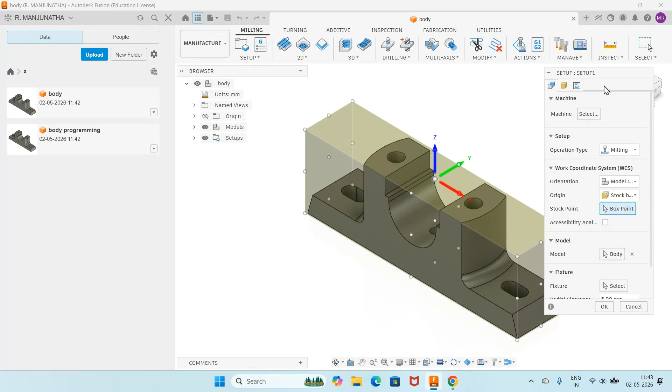Now if you click on this side, the front view, you can see whatever you have in yellow, with the snapping points - those are all stock box points. But since the stock is to be removed, the origin point of the stock will be removed the moment we start machining it.

So always remember that the origin point should always be the part. For that, you come down and click on model box point, and observe these snapping points - what will happen. Automatically, the stock points or snapping points will shift to this gray part. Whatever is in the gray part is the one which actually represents the part's snapping points.

So if you go to the 3 dimension view, you'll be able to see which are all the snapping points. I want to take the top lower left corner here - just click on this. So the origin point is shifted to the model box point, at the lower left corner, at the top portion. Always remember that the origin point should be at the top surface of the model.

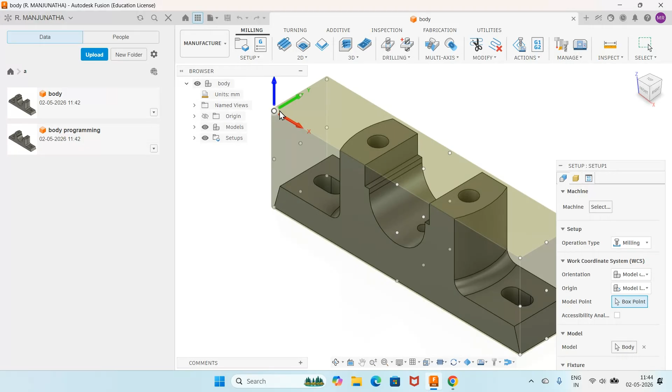Once you do that, you come down to the stock. Since the mode is relative - with reference to the model part - I want to give the dimensions. So I'll go for the stock side offset. I'll take this as 5 mm.

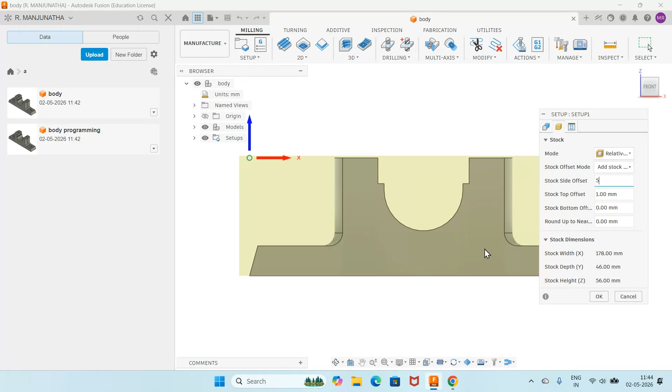On this side, you observe - on the left side it's taken as 5, and similarly on the right side also it's taken as 5. Then I want to give the stock top offset as 5 mm, so it will take the top offset also as 5. And in the bottom offset, I'll take it as 20.

Because I need the part to be clamped in the beginning, that's the reason why you're giving more material at the bottom. These are the stock dimensions - the overall dimension of the stock after giving the stock offsets. Once you do that, just click on OK. So this is the first setup of your model.

The moment you do that, the next point is I want to go for the operation. What operation I want to do in the beginning is remove 5 mm on the top surface of the model. To do that, I'll go for 2D facing operation.

Here, the moment you go for the stock offset, this stock offset always depends on what raw material is available in your shop floor. Based on that, it will be done. Or else, if it's not there and inevitable, you can purchase material from outside. The main intention of showing all this is because I can add the stock material to the part which already has the finished sizes - for that, I'm using the raw material.

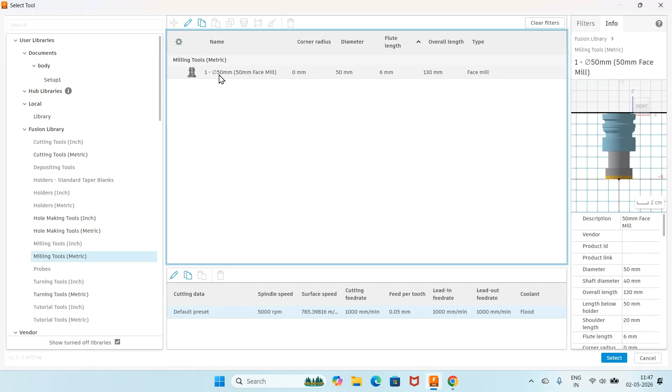So the tool category is milling. You come down to face mill, click on this face mill, enable it. So only the milling cutters of the face mill which is available in the library will be listed here. You just click on the milling tool and click on select now. The moment you do that, the cutter will appear on your screen.

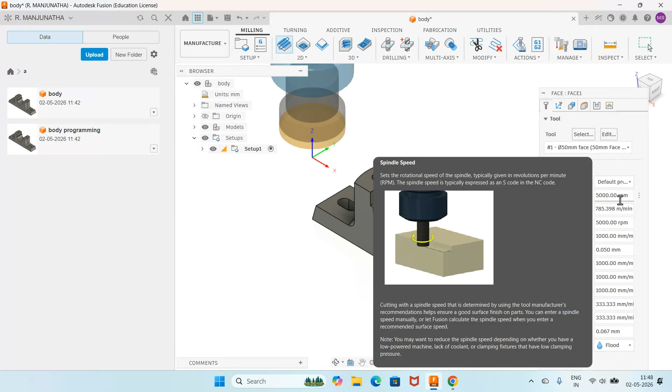So then I need to set the cutting parameters. Always any cutter will have preset values already set in the library, but depending upon the raw material and depending upon the type of cutter you are using, all these parameters will be considered now.

So to do that, first I will go for the spindle speed. Instead of giving 5000, I will take 2000 RPM. The surface speed is always given in meter per minute, so the moment the RPM is given, it automatically converts this into meter per minute.

Then I want to give the cutting feed rate, that means what should be the feed rate, the distance traveled by the job per minute. That is the cutting feed rate. Since during the cutting operation the job has to move slowly, instead of taking 1000 mm per minute, I will take 100 mm per minute.

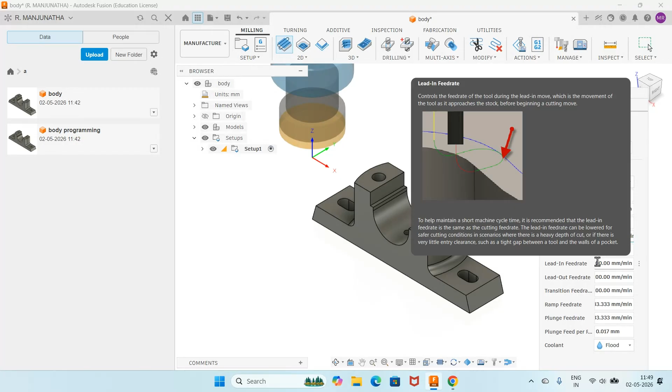Then lead in feed rate, that is before cutting, how the tool should approach the job, which will be 100 mm per minute. Then after cutting, the tool has to leave the job by giving more, I will take 150, and all other dimensions you take as default.

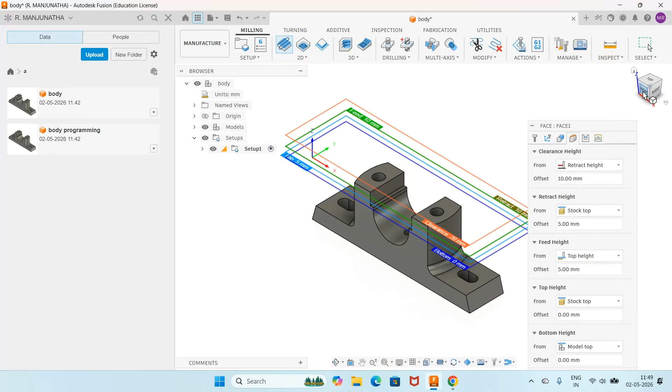Then you come down to the geometry. Select this as the stock selection, that is automatically considered, so we need not take it out. You just click on the heights of the cutter. These are the reference planes where you want this cutter. Here the bottom height is the model top.

Yes, till there I need to remove the material. Top height is now which is at the stock top. Yes, this is the top. This is the bottom, this is the top offset.

Then after that, the feed height is top height. This is the feed height. Then feed height is the top height. Then retract height is stock top, so this is the stock top, that is this one is the stock top.

Retract height, instead of taking the stock top, I will go for feed height. So the moment you set this, it will become the feed height, that is the retract height. And then the clearance height is from the retract height, that is this one. So once you do that, now we have all these settings. How many? 1, 2, 3, 4, 5. So these are the references which you want to do it.

So once you do that, now I will go for the finishing passes. We don't give any finishing passes, and there is no roughing and finishing for this entire program, so I will just come down to the multiple depths.

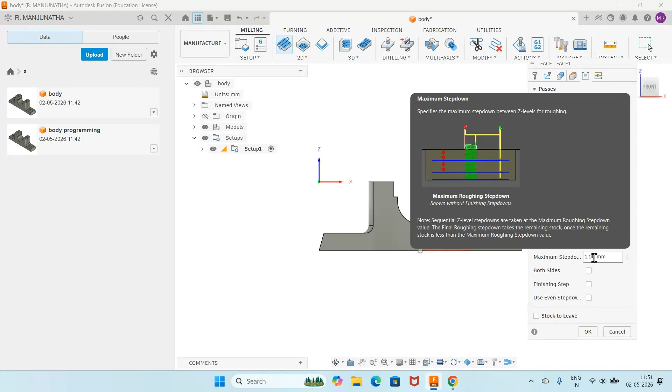So maximum step down is, since I want to remove the stock from the 5 mm stock, I need to remove from the top. So the maximum step down, that is the depth of cut, what I am trying to give here. You can specify maximum step down between Z-levels for roughing, or even for finishing operation. Since I'm taking directly the finishing part of this, enable multiple depth and give the maximum step down as 1.

And I will just click on OK. So now the first part of the machining phase is over.

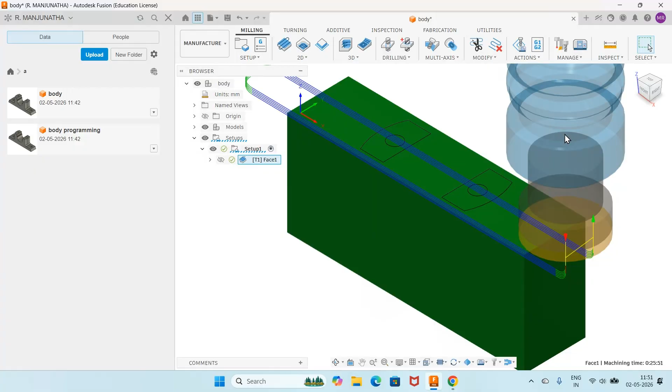So once you do that, now I will try to check whether it has taken or not. You just go to the simulation, reduce the speed of the simulation, and click on this. So now you are operating this on both ways of the cutting operation, meaning while going forward and also on return, both will have the cutting operations.

So you just go to the statistics. So what is the machining time?

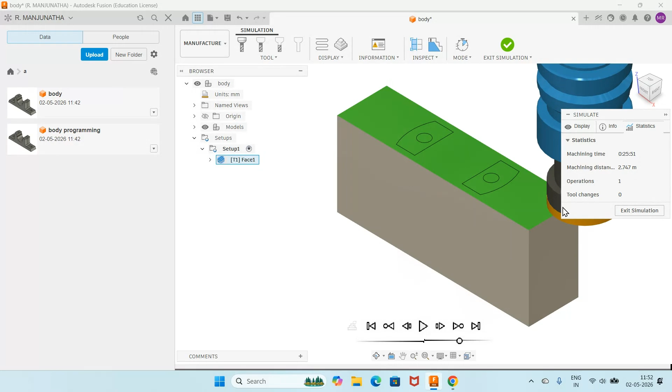The machining time for the facing operation will be 25 minutes 51 seconds, and the machining distance is 2.747 meters. This is all the data given to you. Once you're satisfied, go to exit simulation.

Since the cutting operation is done on both sides, I'll go to edit for this operation. Come down to heights or passes, where the direction of cutting is on both ways, so enable this option. Then click OK.

Now we will go for the second operation where I want to do 2D contouring. I'll go to 2D and click on contour. For 2D contouring we will not use the facing tool, instead we use the end mill. The advantage of the end mill is that cutting takes place even on the periphery of its diameter.

Go to select. In the previous library, the tool we selected was the facing mill operation. Now we want the milling tool matrix, so come down to flat end mill and enable it using the filters. We have different types of flat end mills available here. I'll consider a 10 flat end mill, click on it, and click select.

Once you do that, you'll again have the cutting speed parameters to consider, based on the raw material to be machined and the tool material you're using. For mild steel we use HSS, but for an EN19 material, where hardness starts around 45 HRC, HSS is not possible to cut the job, so in that case we go for carbide.

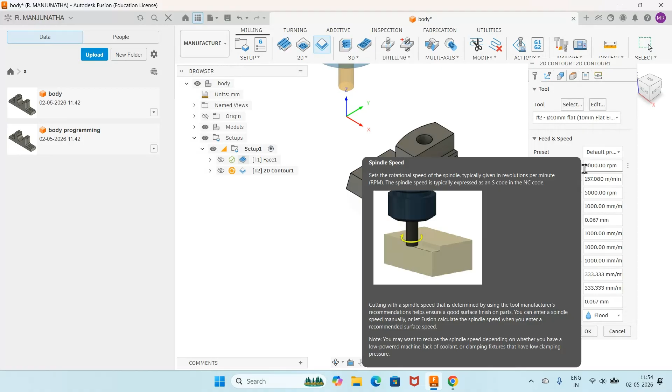But that also depends on the programmer's experience and the cutting speeds and parameters given in the catalog for that particular cutting tool. Based on that, we will consider the values.

So now I'm going to give again 2000 RPM, and the cutting feed rate I want at 100. Then the lead-in feed rate is 100 and the lead-out feed rate is 50.

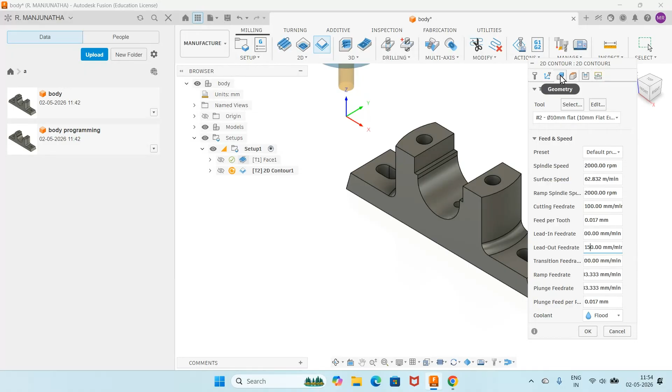Then come down to the geometry. Click on this chain, click on this bottom chain, and then I will click OK.

Then come down to the heights. You can see bottom height is the selected contour we picked from here, and the top height is from the stock top. Since you don't have the stock top now, come down to model top. Observe what happens when you click on model top - it comes here.

So what is the feed height? Feed height is from the top height - this is the feed height. From the top height, it should be from the top height, that is from here, which will be 5 mm.

Then retract height is from stock top, yes. Then similarly the clearance height is from the retract height. From this height, this distance is 10 mm.

So once you do that, the bottom height is the selected contour, top height is the model top. Feed height is from top height. The retract height is from feed height, and the clearance height is from retract height. So from this distance to this is 10, from this distance to this is 5, and from this to this is 5. Once you do that, now we will come down to the finishing passes.

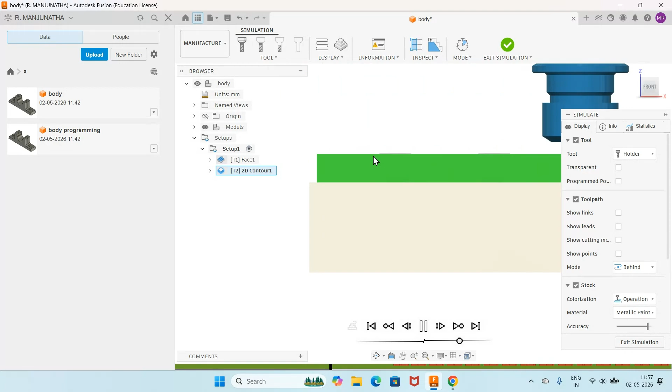You just click on this point. Now in the beginning there is no error - that's because the tool is moving, contouring the profile in this particular fashion. But as the depth of cut is increased from 0 up to 55mm, now here the tool holder is touching the job. That's the reason why you have this particular red mark.

So I want to avoid that. I will exit the simulation and go back to the 2D contour, right click on that, and go to edit. Once you go for edit, you come down directly to the cutter. You just go to edit of that particular cutter now. So here, go to the cutter.

So now you change the overall length. The length can be changed depending upon the tool available in your shop floor, or depending upon the geometry given by the cutting tool catalog box - you have to change that. So here the shaft diameter is 10, that will be considered. Then the overall length - this is the overall length of the cutter.

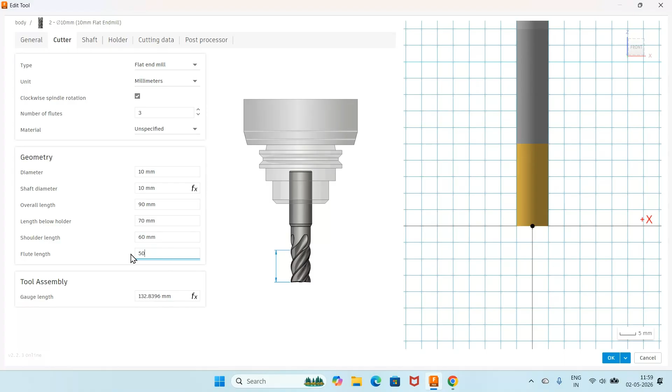I will take the length of the end mill as 100, or 90 I will take. Once you take that length, below the holder I will take 70mm, because the remaining part needs to be clamped in the tool holder. So I will take the length as 70. Then the shoulder length, I will take it as 60 - this is the shoulder length. Then from here, the flute length will be 50. Once you do that, click OK now.

Then again I will go to the same thing. Once you have changed this, the rest of the things I will take care of as is, and click OK now. Now we will go for 2D contour, and then go to simulate. See whether any errors are there - no issues are found. So now it runs smoothly now.

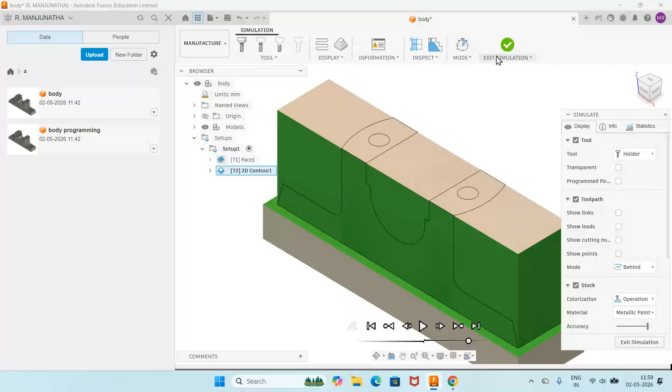So this is how you will be able to rectify the problems encountered during the programming. So one should do that. The next part - this is the contouring of the job, so one should do that. Now we will go for the next operation, which is to remove this. For that, I will go for pocketing, 2D pocket.

So again, you go to select, take the same flat end mill, click on this flat end mill, click on select. Then I want to select the speed as 2000. Then I want to take the feed rate as 100, and from here it is 150.

Then you come down to the geometry. When you want geometry, since it is 2D pocketing, you just click on this, select the surface on this face, and click OK. Again you go for 2D pocketing on this side, select it on this side now, and click OK now. So we have 2D pockets.

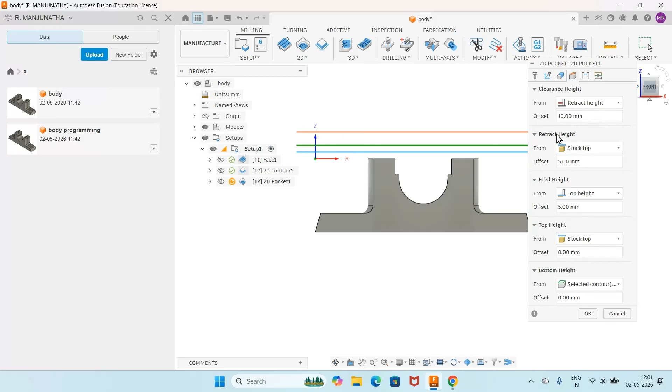Then once you do that, you come down to the heights. So here the bottom height is the selected contour. Then the top height is the stock top, that is the model top. Then the feed height is from the top height, yes. Then retract height is from stock top, yes. Then the clearance height is from the retract height. So now the condition is the bottom height is the selected contour here, which is the removing of the pocket.

Then the top height is the model top, so this will become the top height. Then this is the feed height, then this is the retract height, and then this is the clearance height.

Once you do that, now you come down to the passes, to the multiple depths. So every time, how much do I want to remove the material? From here to here it is 41, that is the total depth, that is 55 minus 14, which is 41. So every time if I want to remove 1 mm of material, then it becomes too large.

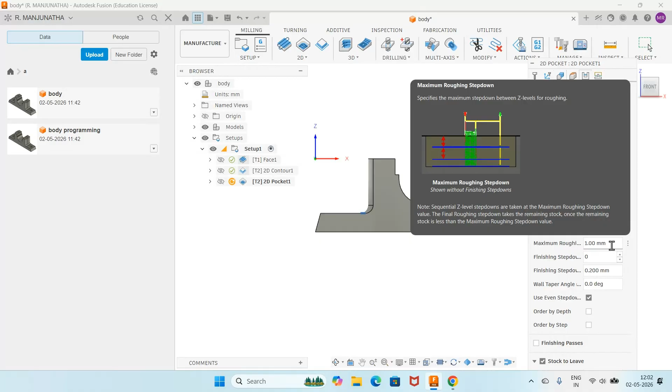Then you just click on this and make it 3 mm, or you just take it to 2 mm, so that it will reduce the finishing step down and all those things. So now we don't have anything to stock to leave, I will disable it, okay. So I'm just finishing directly here, and then you just click on OK now.

So once you do that, now we have the operation completed on both sides. Now we want to go for the simulation.

You just go to simulate and click on this side, and no issues are found. You just click on this side. Now we are removing the material from the sides, so this is what—

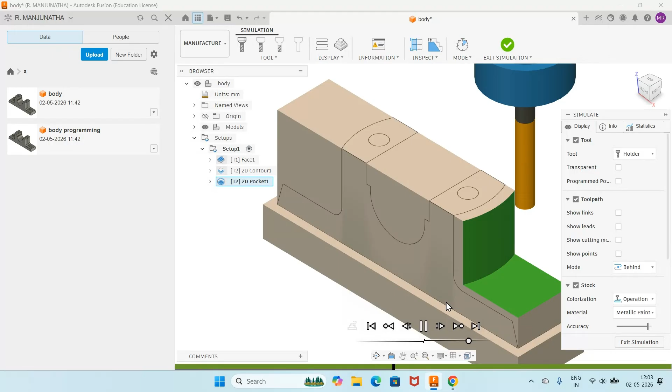Now we have this portion, so we are doing this body pocketing.

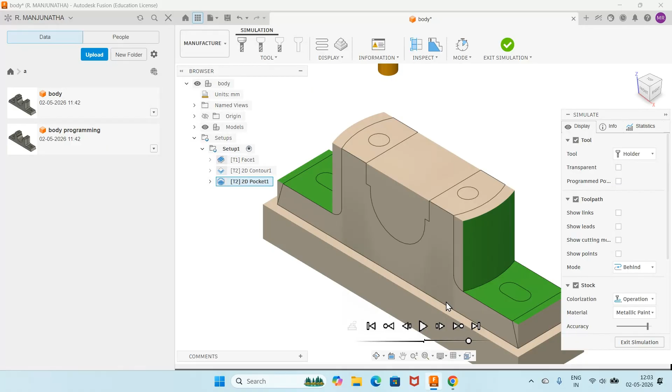Okay, so after this, now we are going to remove this, exit simulation now. Now we want to do this particular portion, which is the filleting operation. We'll just click on this.

Now for that, I will go for 2D contouring. You just click on this. Now I want to go for the selection, so for that I will have to go for—

Ball end mill. So I will just go to the whole milling matrix, then come down to ball end mill. Select the 12 mm ball end mill. Yes, 12 ball mill, so now I will just go to select.

Once you do that, now we have this operation. In this, I want to take 2000 RPM, then I will reduce this to 100. Again, lead-out feed rate is 150. Okay, then come down to the geometry.

So now what I'm doing is I'm selecting this geometry for the time being. Okay, and then click on OK.

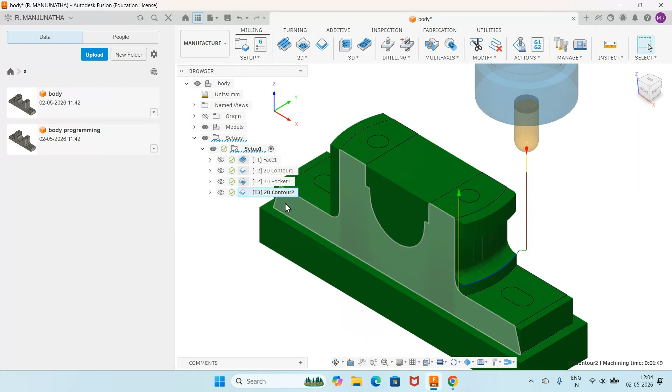Similarly on this side, sorry, one minute. I will just go to 2D contour and go to edit. Similarly, I want to come down to this geometry and you click on this side down. Okay, yes, click on OK.

Now you go to the 3 dimension. Okay, now you come down to the heights. So the moment you come down to heights, now you can see the bottom height is the selected contour.

The top height is again the model top. Then the feed height is the top height. Then the retract height is from the feed height. Then the clearance height—so here the bottom height is the selected contour, this one.

Then top height is the model top, that is this one. Then the feed height is this point, this line. Then the retract height is this line, and then the clearance height is this.

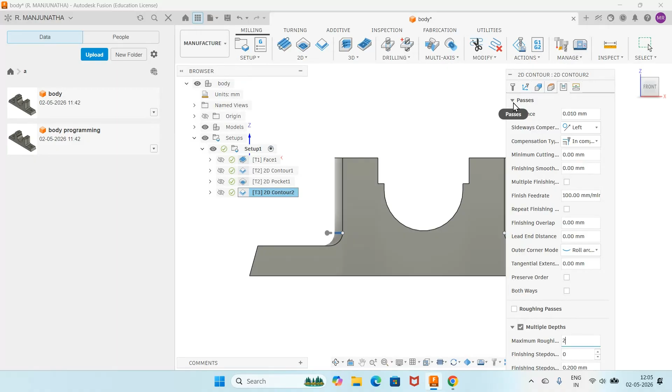Once you do that, now you want to go for the multiple depths. So I want every time to remove 2 mm, and then you just come down to this, then click on OK now.

So once you do that, now the cutting operation has been done. So again, I will go for the 2D contour, go to simulate. So now we want to give this removing of the material now. You just come down to this.

So now it is initially cutting here. The problem will start only when the tool holder comes and touches the top surface of the part. So this is where the clash will happen, wherein the tool holder comes and hits the job, so that is the one where I need to change this.

So to adjust this, I will again go for the 2D contour, then click on edit.

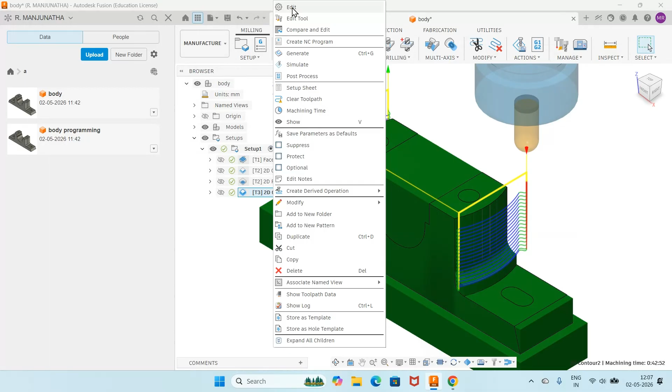Now you come down to the edit of this tool, the cutter. So the overall length of the cutter, I am going to take it as 90 mm. Then I want the length below holder, I will consider it as 70. Then the shoulder length, I will take it as 60. Then I want to take the flute length as 50.

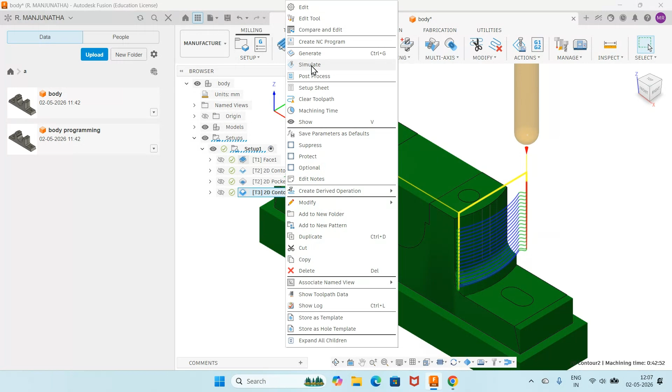Then I will click OK. So now we go for the simulation. This part has been removed. So I'll go for checking this. Again, go to simulate. Now there are no issues found, and I will go to this, and now it will start removing the material.

A little bit faster now. So this is removed here, and similarly on this side. But now the problem will be that even though you are removing the material, this amount of material is left out. Why is that happening?

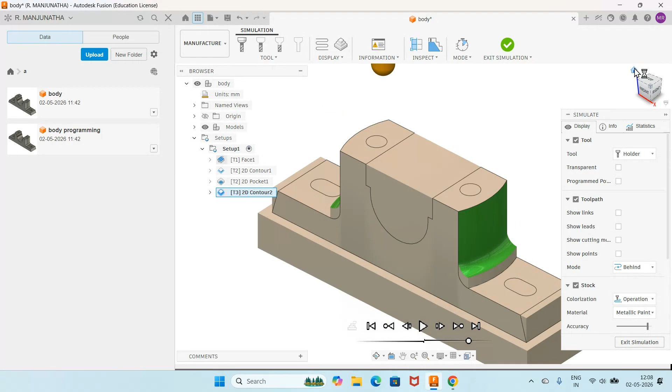That is basically because the moment when you go for exit simulation, you click on here. We have taken this as the 2D contour. So that is the reason why the tool goes there and stops. But I want the tool to be cutting here also. So for that, I'll just go to 2D contour and then go to edit.

So you come down to the heights. Then the moment when you want to go for the bottom height, instead of selecting the selected contour, go to selection, click on this surface and also on this surface, both. Click on OK now.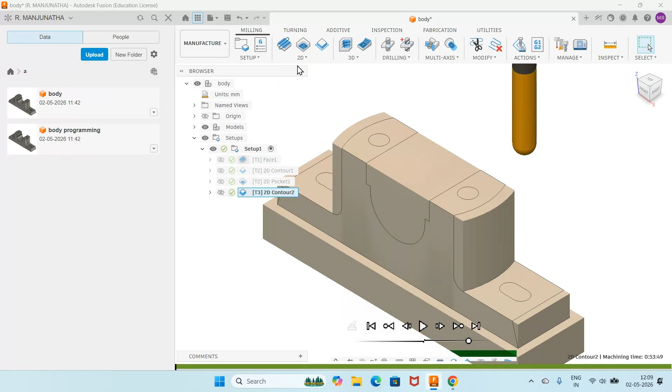Now you just go to 2D contour and then go to the simulation part. Now you just remove this. Now you can see the entire portion has been removed. So this is how you will be able to rectify this particular position. So this is one part of our program. Now you go for exit simulation.

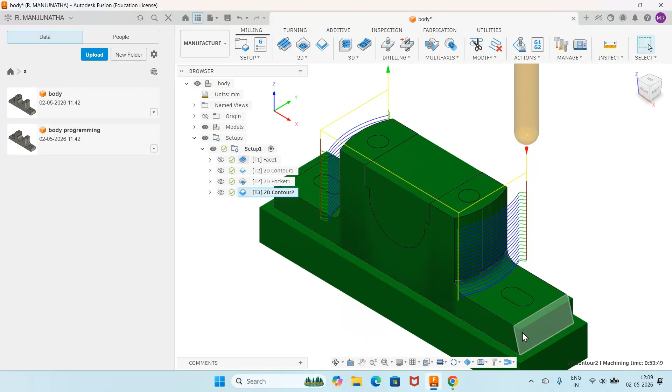So the next thing is I want to remove this particular portion. To do that, I will go for 2D. You just click on this. So go to 2D contour. Now I want to take the tapered end mill. You just click on this selection of the tool, come down to milling tools, then go to tapered mill, enable this.

Then I want tapered mill of... I will take these standard tapered mills which are available. Here I will go for a tapered mill of 8 mm diameter. Then I will click on select.

Now I will reduce the speeds again to 2000. Then from this, you make it 100. Then on this side, I will take feed rate as 150. Then you come down to the geometry. Click on this side, select on this open, select on this one.

Click on select on this chain. Click on OK. Then come down to this pass, sorry, come down to this. So the bottom height is the selected contour.

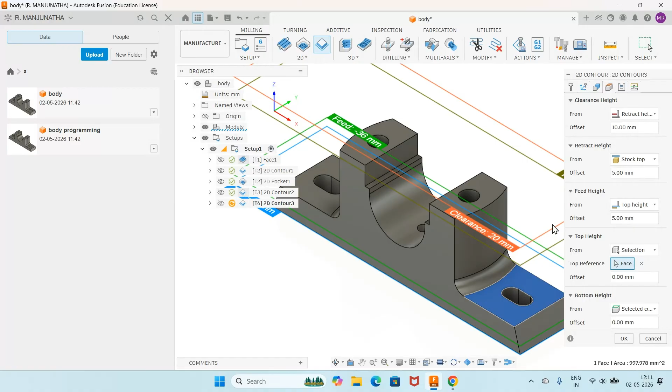The top height is stock top. So you go to the model top. Stock top is the top height, I want to select from here. You just click on this. Then the feed height is from the top height, it is 5 mm. Then the retract height is from feed height. Then the clearance height is from the retract height.

Now, if you do like this, then the object will be here. See how it will function now. Then you come down to the passes. Then I will go for multiple depths, and I will take just 2 mm on one side. You just remove this portion here. Then you click on OK now.

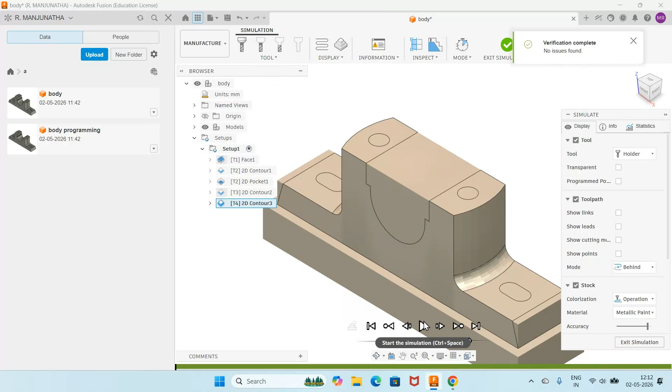So now we have the three-dimensional part. Now, if you try to simulate this, you just go to simulate. If you try to remove it, the tool will remove the material. But this angle is not achieved. That is basically because I need to give the angle there. So to do that, I will go to edit tool.

Now you come down to edit, come down to cutter, go to cutter. Here the taper angle, you take it as 30 degrees. Then I click on OK.

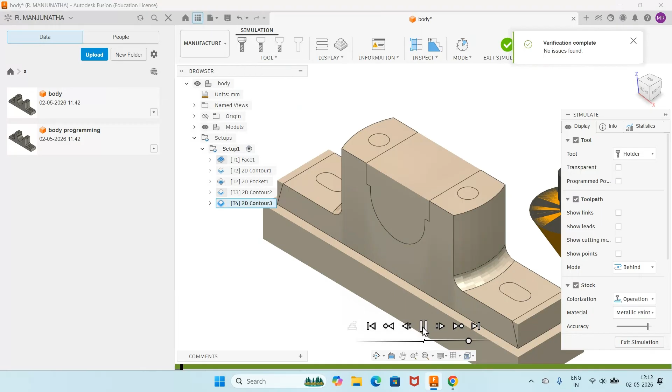Now you just take the same thing again. Now you go for edit, simulate. Now you do the same operation again. So it is removing here. So it is going extra now.

I will give for exit simulation, and you come down to this, go to edit, make this angle - sorry, edit as instead of 30, you make it 16 degrees. So go to cutter, make this as 16 degree.

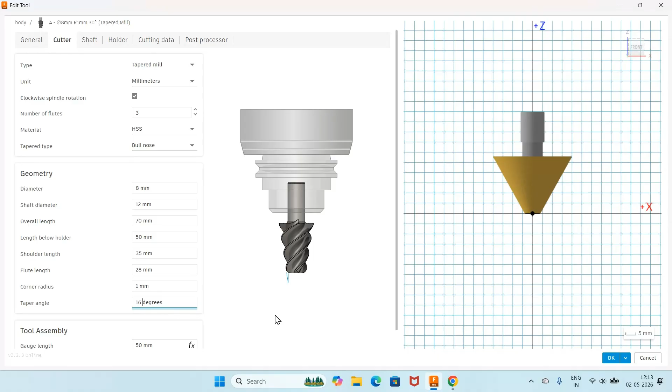Click on OK now. So now it will be able to remove this material. Go to simulate and then cut this operation, and you will be able to get this. Now come down to exit simulation. So this portion is over.

Now we want to go for another operation on this side. Go to 2D contouring, then go to select, then come down to 16 degree tapered. Click on this, click on select now. Select this as 2000 RPM, then reduce it to 100. Then I want the lead out feed rate to be 150.

Once you do that, come down to the geometry, go to the chain, click on open chain, and come down to this side. Click on this one. Then come down to the heights. Selected contour, bottom height. Then top height is the selection of this one.

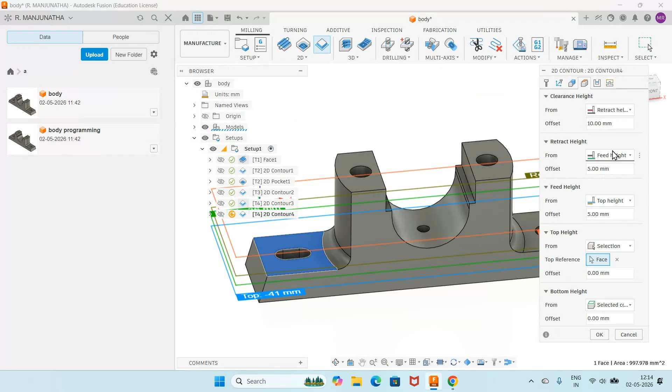Top height is the selection of this. Then feed height is from top height. Retract height is from feed height. Then the clearance height is from retract height. Then go to the passes, go to multiple depths, take it so every time it removes 2 mm of material. Once you do that, I'll just click on OK now.

Now I will go to the finishing operation. So what I will do is go from this entire setup and go to simulate now, to see if there are any issues. If you do that, there are some errors found here.

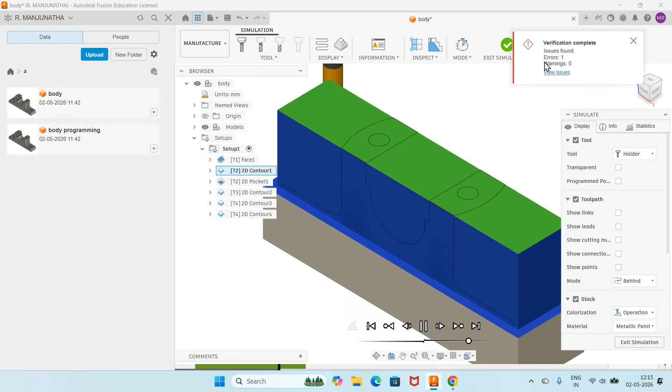That is basically because if that is the case, then I cannot do it like this. Instead, what I wanted to do is on this side. So this portion is over, but the problem is with this. So we cannot do that particular option.

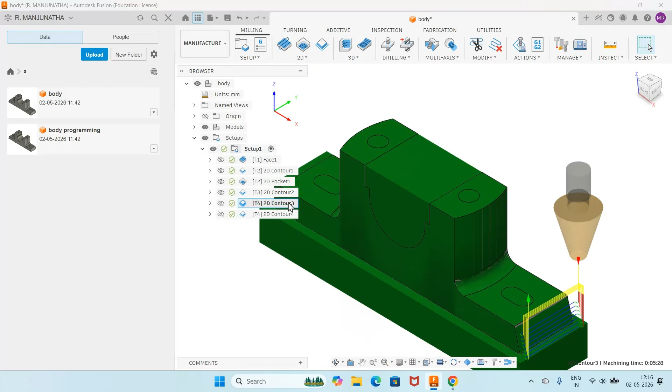So I will go to 2D contour and then go to edit. Here, go to the geometry. Fine, so when you go for the selected contour, the top height should not be from that - you just take the model top now. That is inevitable, so take all other things as they are. Just click on OK now.

Similarly, come down to the 2D contour, then come down to edit, and come down to this geometry, the height. Then go to the selection as top height, or the model top. Then the rest of the things are considered here as they are. Just click on OK.

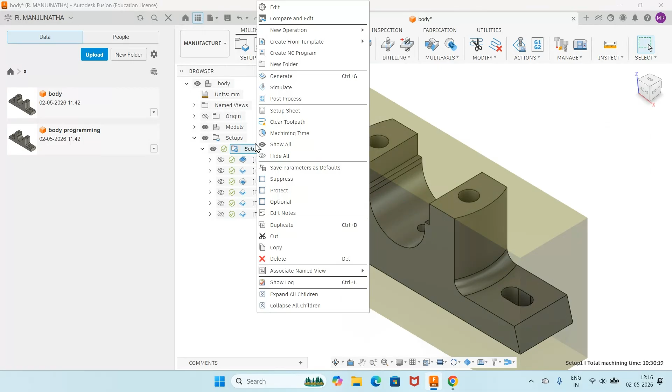Now if you apply this and go to simulate, you will not be able to see any changes here. So the verification has no issues, but the only problem if I do it like that is on this side. I will show you that.

So the moment when you do that, here you are coming and getting this. The reference is from previously, it was very fast. Now here the problem is there is no cutting, but still you have to do that. That is the reason why I was telling you lots of non-cutting operation will take place.

So the moment when you go to this, it moves back again and starts cutting here. This is inevitable for us. That was the reason why the moment you take only from here, immediately the cutter moves to that - instead it should go to that point. That is why I took a new cutter, but it's still following the same thing, so we cannot avoid that.

Now we will go for removing this oblong slot. For that, I will go for 2D slot. Click on that - what is the radius of that? The radius of this is 5. So I will go to select.

Then similarly, you take 100. Then I want this to be 150, the lead out feed rate. Then you come down to the heights.

Then I will click on OK. So again, I will select this portion. Again, I will go for select, go to the chain, click on this one. Click on OK. So then you go to the heights.

Here you come down to the 3 dimension and go to this stock top. Now what I want is I want from the bottom. So you go to selection, click on this side. Click on this face. That is the top height. And similarly on this side.

Then go to feed height is from top height. Then retract height is from top height. That is from feed height. Then the clearance height is from the retract height. Then go to passes. Here I'll go for multiple depths. You take 1 mm. Then you just click on OK now.

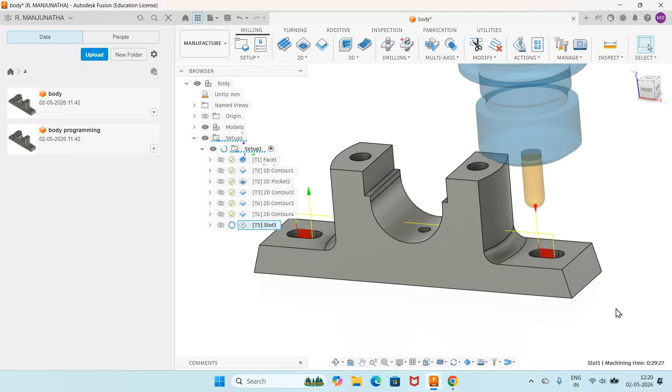So now here it is cutting, but still it is showing some, there is some problem in the error. You just click on this. So it is cutting here. Then again, it is cutting in this side only. So now the problem, there are two types of problems which we are facing here.

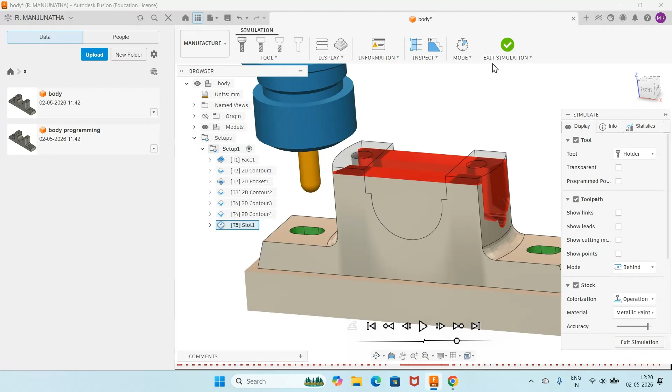So I'll go for the exit simulation, go to slot, go to edit. So come down to the edit tool. Then here, go to the cutter. Then change the cutter overall length is to be 90. Then length below holder, you take 70. Then you go to the shoulder length as 60. Then you take this length as to be 50.

Click on OK now. Now we will try to finish it. Let us see what happens now. So you will just go to, again, you have the same problem. So I will go to simulate.

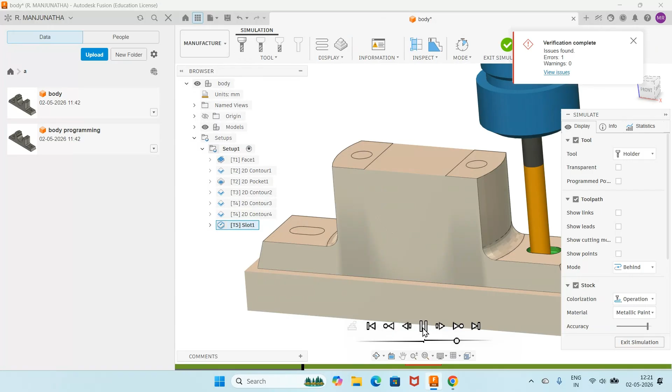So you have only one, this thing. Now we have the cutting here. So that is not to be considered. Again, you go to the slot, go to edit. So you come down to the heights. Then you bottom height is okay, selected contour. Then the top height, don't go for the selection. You just come down to the model top.

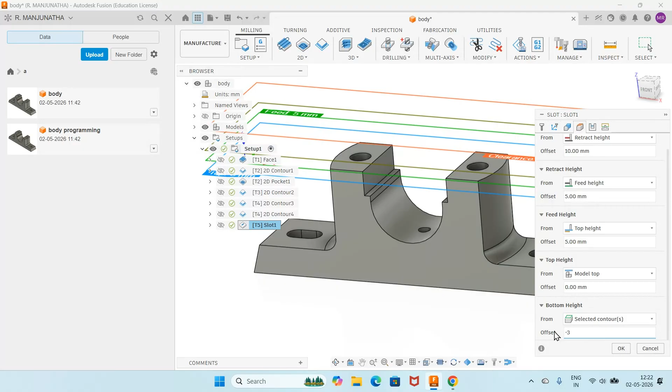Then everything remains the same. And in the selected contour, you just give -5 or -3. Click on OK on this side. Now, so now we go for slot, go to simulate. No issues will be found now. You just come down to this. So the only problem is again, it is moving from the top. So that is the only issue which we are

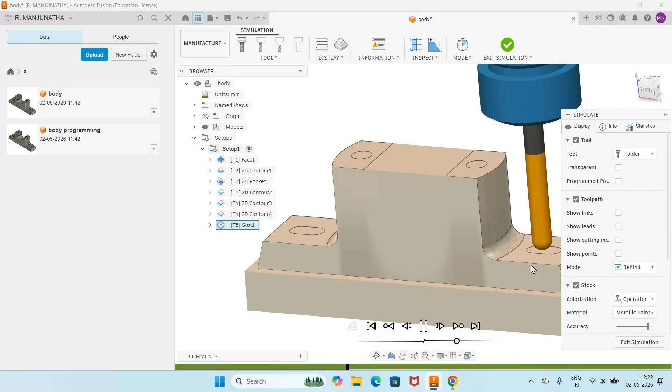considering now. So again, I will just go to that and start removing the material here. So this is inevitable for us. So then, and we have removed this. Then I'll go for exit simulation. Now we want to go for the 2D contouring now. In this case, now I want to remove this material now.

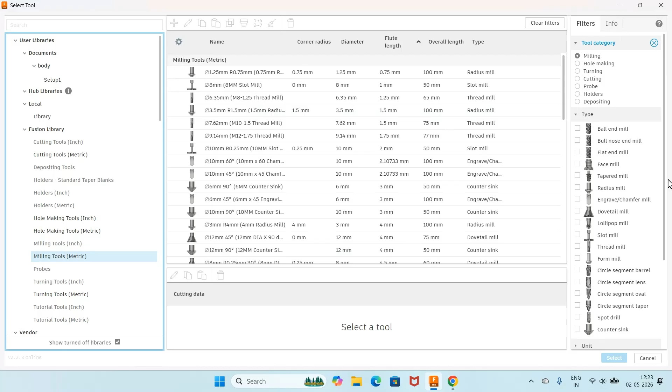So to do that, again, I will go for 2D facing. Then I want to take the end mill, select on this, come down to milling tool, metric. So take the flat end mill, then go for 10 mm, click on this, take 2000 RPM,

then take 100, then you take 150, then you come down to the geometry, select on this, click on open, click on this side, click on OK. Then you come down to this side, click on chain, select on open, select on this side, click on OK.

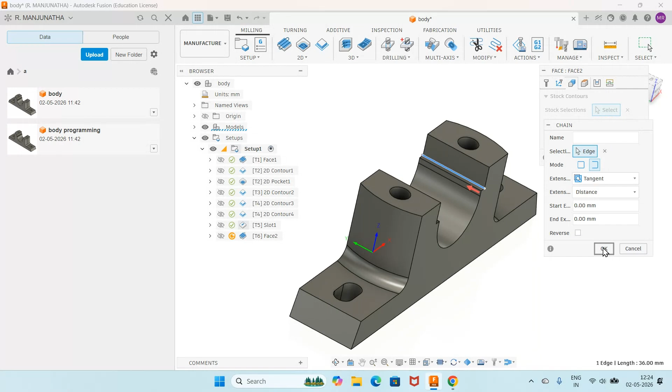Then you come down to the heights. So model top, bottom height is for, so you just come down to this and come down to the flat. Now we want, OK, bottom height is the selected contour. Bottom height is the selected contour. Then top height is the model top.

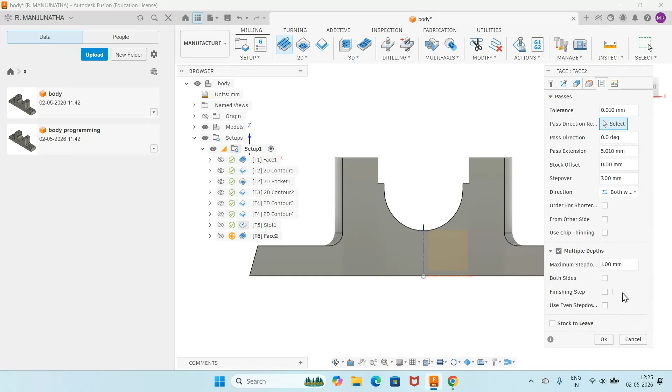Then the feed height. Then feed height is from the feed height. Then you come down to the passes. Go to multiple depths of cuts, 1 mm. Then I want to go for the step over here. Where is that step over both the sides? Then I want to come down to passes is already there. Okay now. So once you do that, you click on OK.

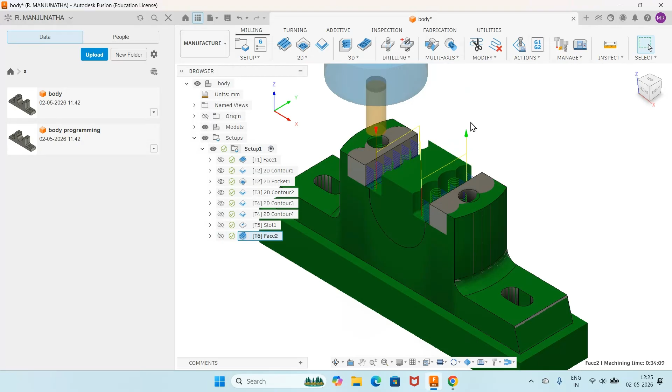Now it will remove this material now. So one the problem is I go to simulate. Then I will just come down to this. Oh, it's removing from this side. I might have made some mistake here. Oh, it has gone to the facing.

You just go to delete now. Just go to delete. Then you come down to 2D contour. Select 2D contour. Yeah. Go to select.

Click on flat end mill. Come down to flat end mill of diameter 10. Go to select, then take 2000 RPM.

Then you take 100, then lead out feed rate is 150. Come down to geometry, select on this, click on open. Select on this side, click on OK. Then come down to this side, then click on this side now.

Open, then click on OK. Now go to 3D, so now we have the simulation part. Then click on this side, so it is removing on this side now. Go to exit simulation.

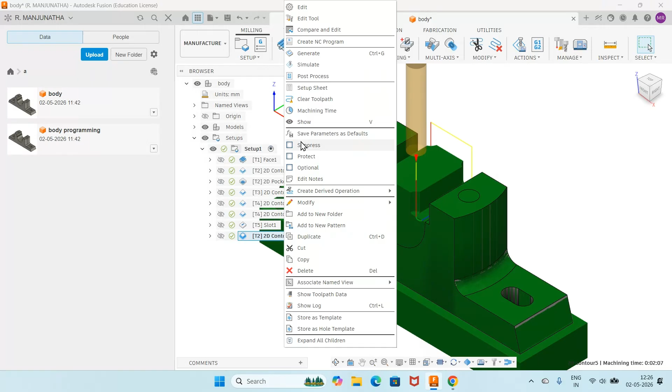Go to 2D contour, come down to edit, then come down to passes, go for multiple depths. Take 2 mm cut, then go for roughing step over. Maximum height is 9. I will take 8, so here I want the passes to be number of step overs 2.

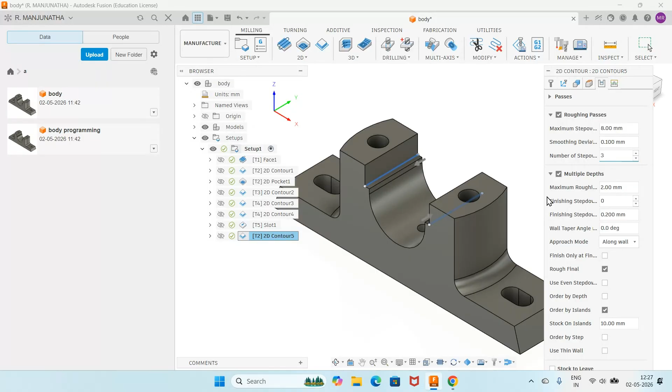Click on this and then OK now. So now it will remove the material but still there's one more. Go to edit, come down to passes, make the roughing passes to be 3 now. Step overs is 3, then click on OK. Now it will remove the entire thing.

Go to 2D contour, go to simulate. Now you can see it removing the part here, but still there's something we are not understanding.

If you go to 2D contour and go to edit, come down to heights. Bottom height is selected contour, the top height should be model top, and the retract height is from feed height. Then click on OK now.

Now it will give the exact simulation. If you click on this side, now it will remove the material perfectly. So now this is the statistics of 36 minutes which are going to be considered for machining now.

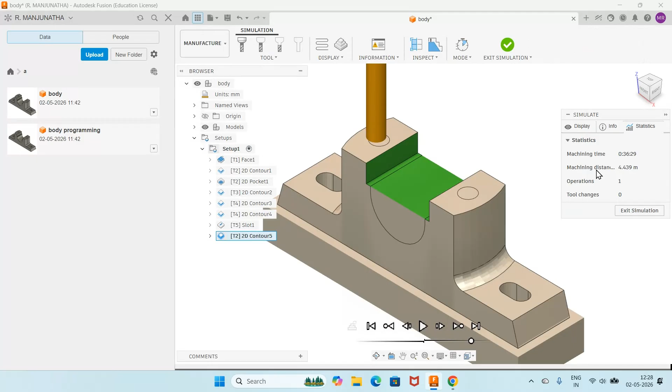So again I will go for 2D contour, the next one. Then I want to go for select, that is the flat end mill. Go to select, take 10 mm flat end mill, yes. Click on select, then come down to 2000 RPM, then 100 mm feed rate, then lead out feed rate is 150.

Then come down to geometry. Click on this side, go to select on open chain on this side. Then come down to this side, click on this side. Go to open, select on this side. So first one I need to select. Then go to select again, click on this side.

Then come down to heights, take the selected contour, then the top height is the model top. Then go to the feed height as top height, the retract height as feed height.

Then click on passes, go to the roughing passes, similarly make this OK. Number of step overs you take as 3, then go to multiple depths, make it 1 mm. Then click on OK now.

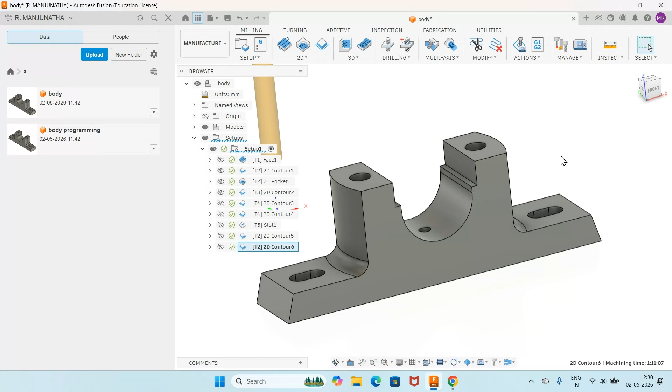So now we have the cutting operation of this. Now I will go for simulate. Now from the setup you do this, go to simulate. Then you go for these operations.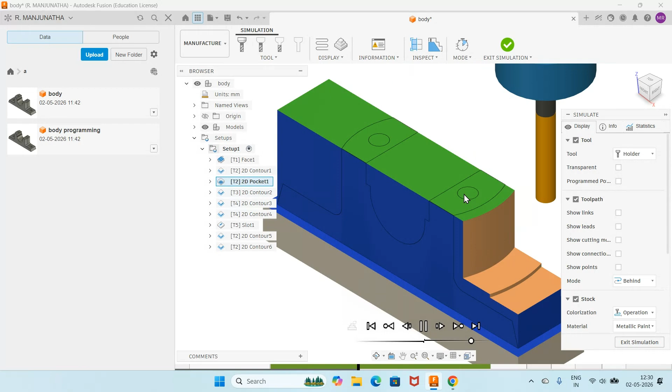So this is how we will be able to get this up to a certain extent. Now we have completed almost everything on this operation. The rest of the thing is only to create these holes now in this setup. This is the machining operations we are doing now. So then the next thing is I want to do the deep hole drilling.

So to do that, first we will consider... similarly on this side, these two are inevitable like this, you can't help it.

The one way you can think of is only for this 2D contour. Go to edit, come down to this heights. Selected contour is this, then instead of top height you take a model top. You just go for selection and select this portion here. Then the rest of the things will remain the same.

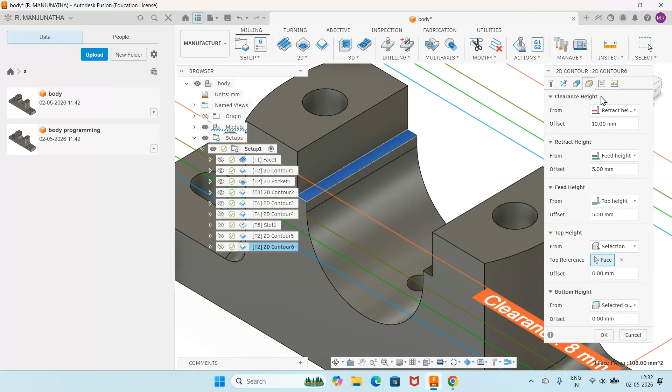See the difference now, if I want to go for simulate on this side, just go to simulate this, only that portion. You just click on this side, so it will remove only that particular portion. So this is over now.

Now the next thing is I want to do the drilling operation of these two. So to do that I will go for drilling. Now first I want to make this spot drill. You just go to the select.

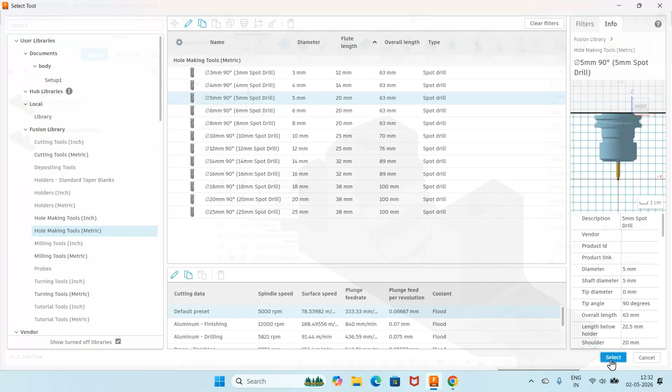Now we don't want it to do the milling tool, come down to hole making tool metric, then I want to go for drill. You just go to the spot drill, take a 5 mm spot drill, and click on select, then change the speed to 2000.

Then you let it be plunging feed rate and all those things, I will take the plunge feed rate as 200, or you take 150, take 133 mm per minute. Then you come down to geometry, you select it on this one, and also select it on this one. Then you come down to heights.

So now, once you are coming to the height, we are at this point. Here, the spot drill is done only from the bottom height, no, you take from the hole top. Give the distance here, you take around 5 mm here.

So what is that 5? I want to give -5. Let us see, yes -5, you make it -4. Okay, then top height is the hole top, feed height is from the top height, then retract height is from feed height.

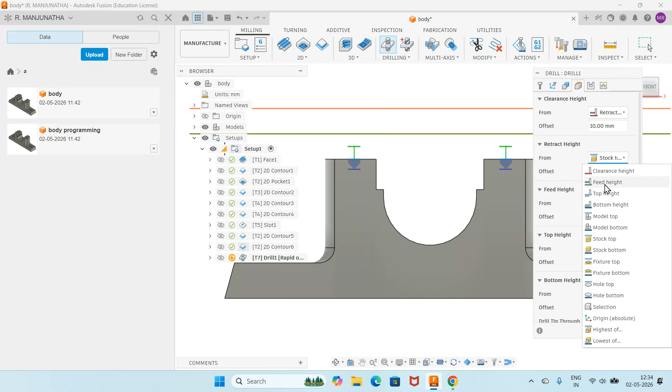Then the clearance height, then you come down to passes. Don't go for drilling rapid, come down to deep drill, then you take 2 mm, and the pecking depth and pecking this one. You just click on this. Now we have these two.

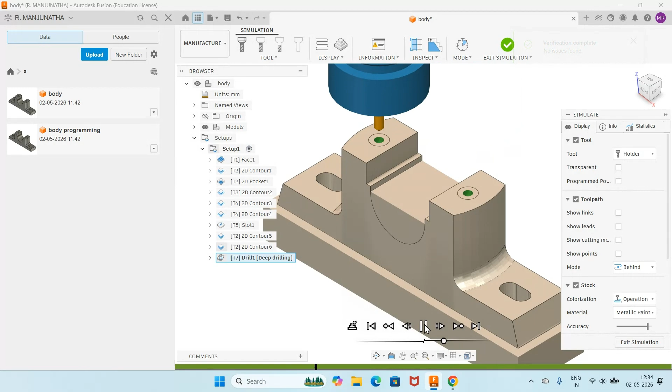So here you just go to deep drilling, go to simulate, reduce the speed, and come down to this. So these two holes are drilled. So again, I'll go for simulate, this is how it will going to remove this. Then you go for exit simulation.

Now I want to do the drilling operation, which is the 10.5 hole. So to do that, again you go for click outside, go to drilling, go to drilling operation. Now you go to select and you go for hole making tools, come down to drill now, and you give the 10.5 mm drill.

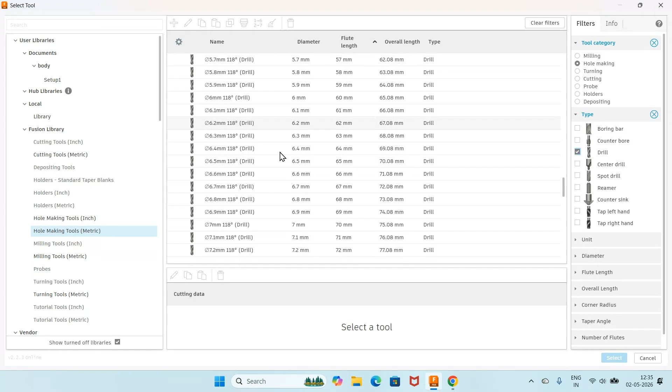Because that is the standard which we are using, you just go to the drill 10.5 and select it. So then I want to reduce the speed, I will take 2000. Then always the plunge feed rate, it will automatically reduce. Yes, so you make it 100.

Then you come down to geometry, select on this and you select on this. Then you come down to heights. So from here, the hole bottom you give -3 because I want to remove the material. Even once you remove that, it should be through and through. Then the top height is the hole top.

Then the feed height is from hole top. Feed height is from top height, yes you click on that. Then retract height is from feed height. Then the rest of the things will be considered.

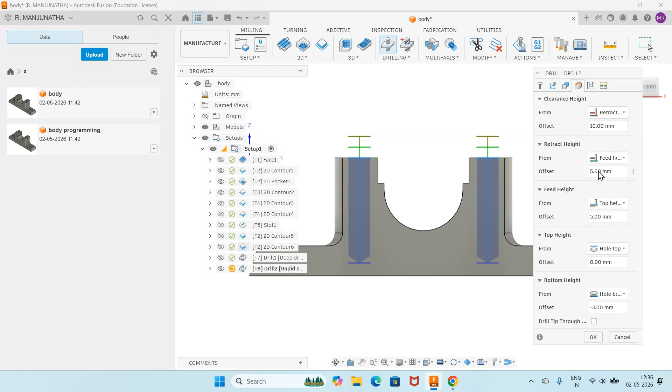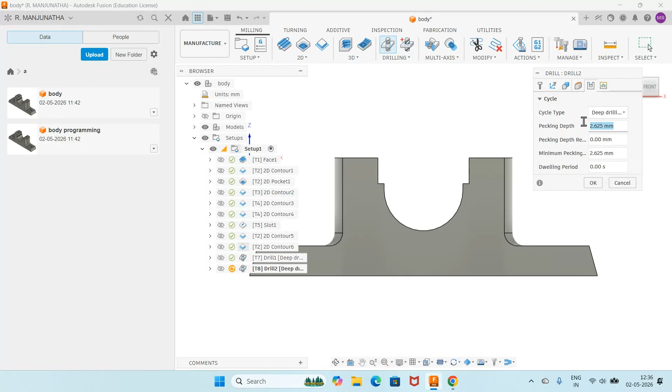Then you go to the passes, go to deep drilling, full retract. What is that? Deep drilling, full retract. Okay yes, then you give 3 mm depth and retract is also from 3 mm. So I will just click on OK now.

So these two operations have been done now. So again, you go to the simulate on this side. Now you just click on this. So now the drilling operation is considered on this side. So I will increase the depth so that it will going to remove the material. So you just come down to this.

So now the first setup of all the drawings have been completed. Now you go to the setup, go to simulate. Now we start doing the operation now, this is for the first setup now.

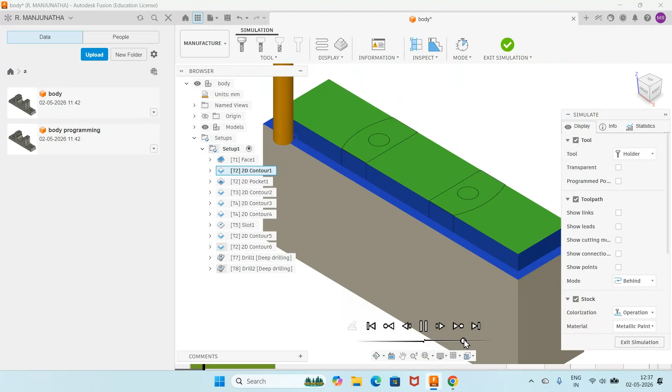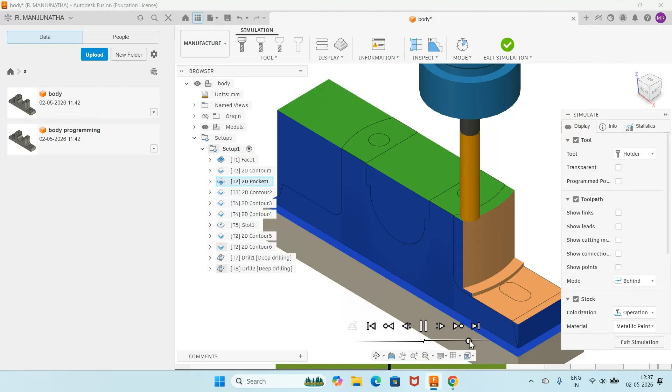So the first one is the facing, then the second one is the 2D contour, then I want to go for the third one, the pocketing on this side, and then on the other side. Then you have the filleting operation, and again on this side, then I want to have the contouring. This is the slotting, again you have the contouring on this side, then you have this undercut. So these are the deep drilling operations.

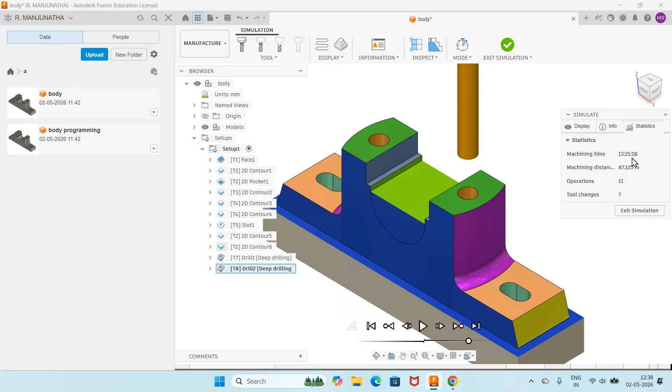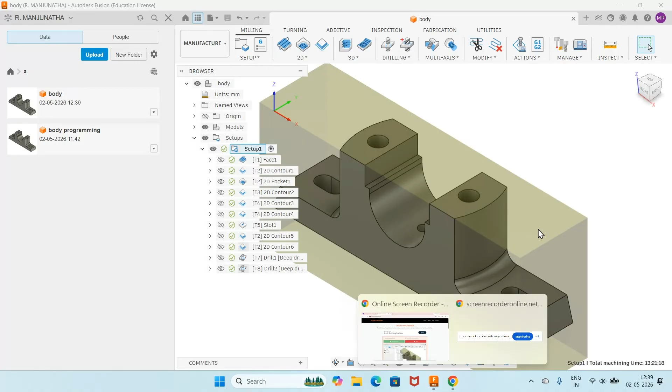Now you go for the total machining time for the first setup, which is 13 hours 21 minutes 18 seconds. I'll just come out of this and I will going to save this particular drawing. So this is how you will be able to create the first setup of a manufacturing part of the body. In the next setup, we will go for how to do the contouring of this semicircle here.